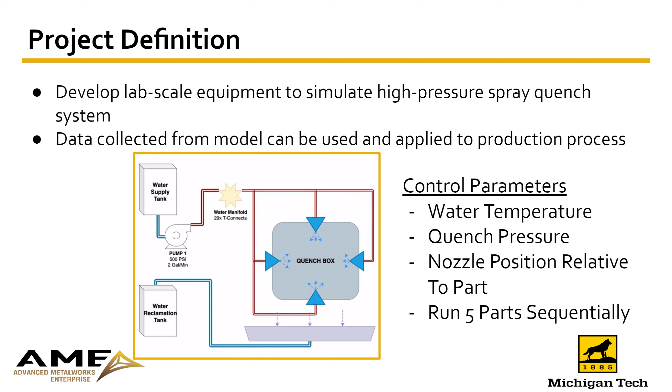Going over the project, we were tasked to develop a lab scale equipment to simulate a high pressure spray quench system. And the data collected from this model can be used and applied to Shape's production process. We're given a few different parameters to monitor and control, the primary ones being incoming water temperature, quench pressure, nozzle position relative to the part, and being able to run 5 parts sequentially.

Design justification for this in-out water flow system is it allows better control over the input water temperature and makes it easier to measure the output water temperature. We can monitor and calculate the reclamation rate of that water and compare that to losses to steam and evaporation. And overall, it's just less complex of a system.

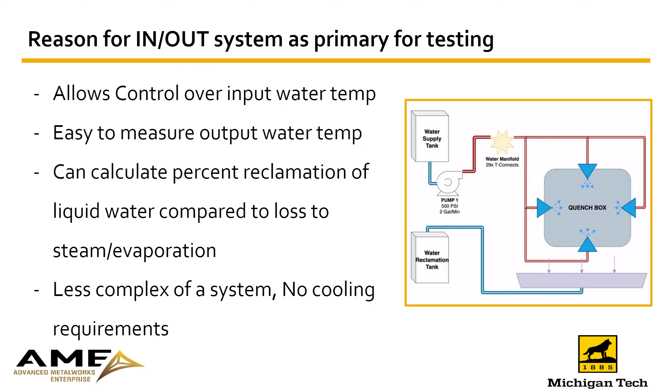So before we can quench parts, we've got to heat them up first. And to do that, we're going to use MTU's gray furnace number 2. We did 3 temperature uniformity surveys on that using AMS 2750G with a set temperature of 1100 F. The first temperature uniformity survey had a working zone of just the dimensions of one part, and that had a temperature uniformity of plus or minus 43 degrees F.

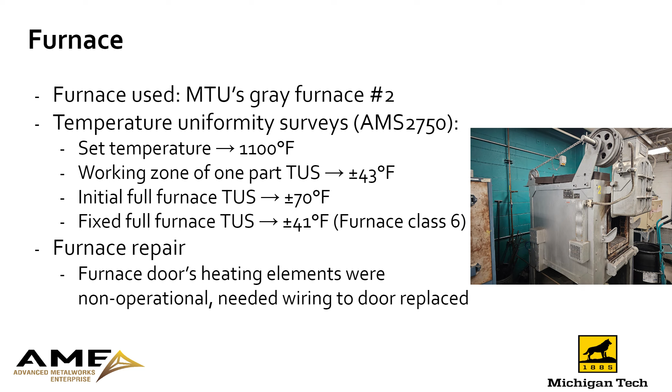Then we did a full furnace temperature uniformity survey that had results of plus or minus 70 F. After those 2 surveys, we discovered that the heating elements on the door weren't working, so we needed to replace the wiring to the door. Once that was done, we did another temperature uniformity survey of the full furnace, and we got a uniformity of plus or minus 41 degrees, which gave us a furnace class 6 rating by AMS 2750 standards.

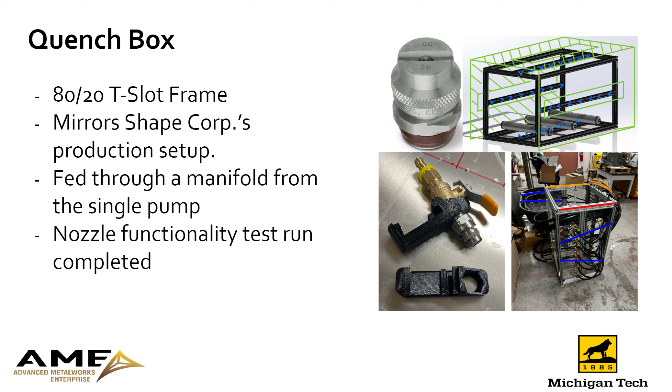With the furnace all set, the next step was the quench box, which we built out of 80/20's T-slot frame aluminum, which mirrors ShapeCorp's actual production setup using their specific nozzles supplied by Granco Clark. The water is fed through a single manifold system that splits out to all 30 nozzles, which are then held in place by 3D printed brackets. We also completed a nozzle functionality test to make sure that the system itself works.

So to make sure our quench box is going to work as designed, we're going to test the quench box using 3 different samples provided to us by ShapeCorp. We're going to heat them up in gray furnace number 2, and then quench them out in the quench box. For each part, we have them thermocoupled up so that you can read the temperature across the length of the part.

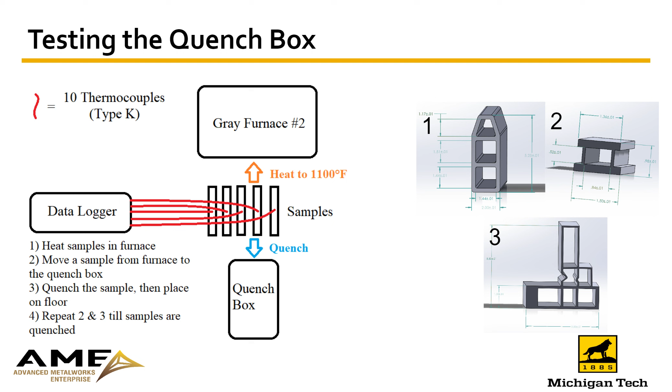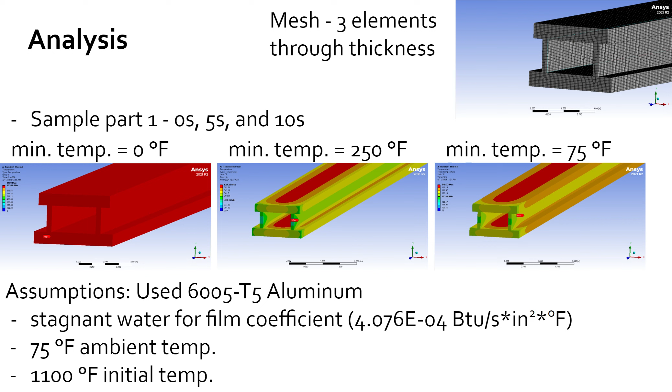To help with the quench box, thermal transient heat transfer analysis models were run for each of the 3 sample parts given by Shape. We used a 3 elements through the thickness mesh for each of the parts. Each model depicts 0 seconds, 5 seconds, and 10 seconds through the cooling process. There are some assumptions: 6005 T5 aluminum, stagnant water for the film coefficient, which is just used for the analysis of that temperature cooling, an ambient temperature for the solutions, and an initial temperature as well.

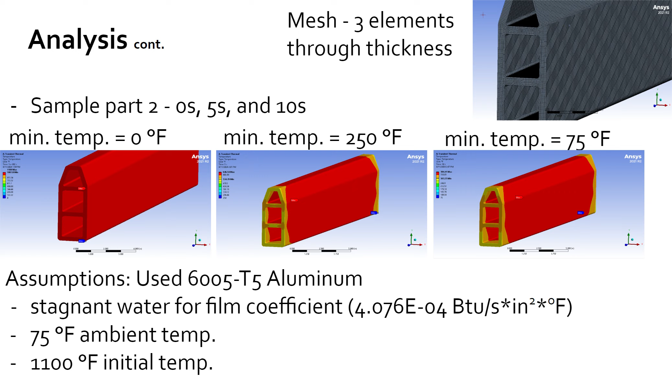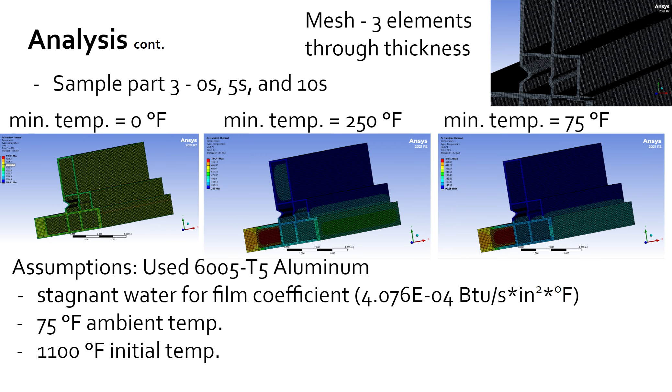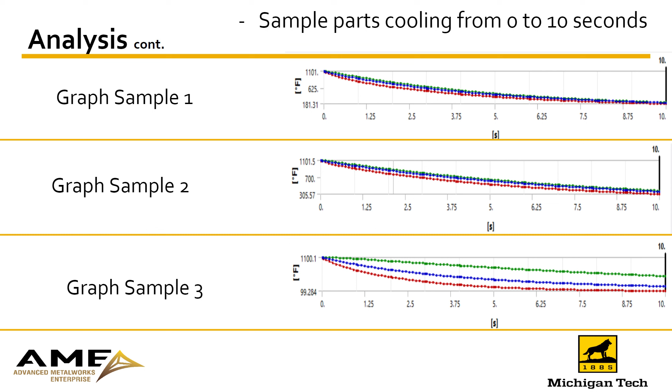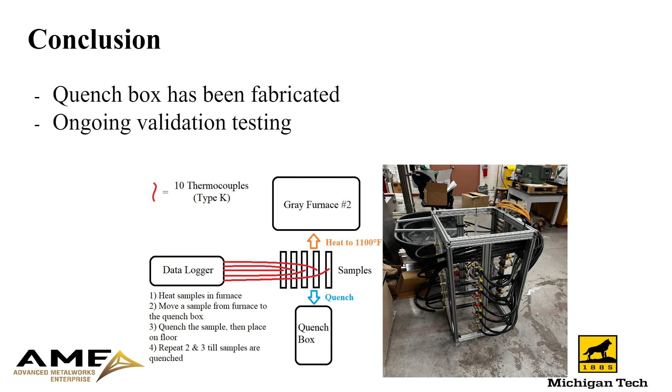With the completion of the quench box and ongoing validation testing, we've completed the requirements set by ShapeCorp, and in conjunction with any additional requirements that come up from the sponsor, we've completed their task. And we will continue our data collection and improvements until the end of the semester.